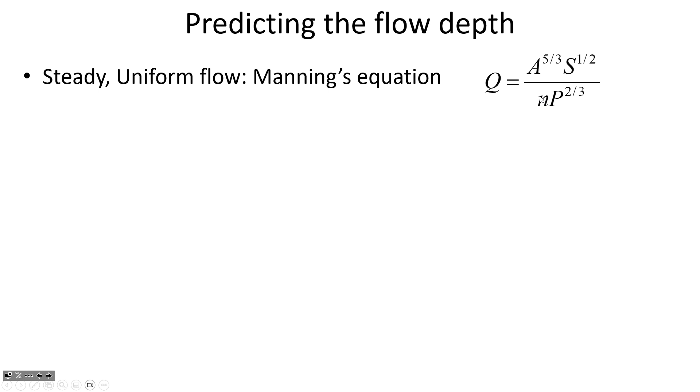So let's just review where we're at with open channel flow. When conditions are steady and uniform, like they were on the exam with that first problem, what it means is that you can calculate the normal depth according to Manning's equation. So the normal depth, just what makes it normal, that would be the flow conditions if nothing is disturbing it. If there's no changes in slope, changes in geometric characteristics of the channel, if it's just steady and uniform, then the depth is determined by Manning's equation.

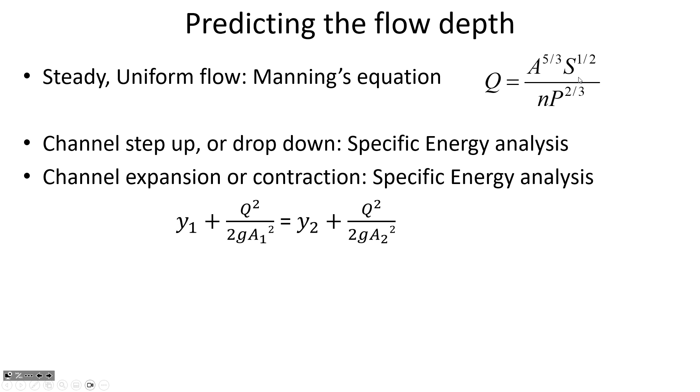If we have variations like a contraction of the channel or an expansion, if the channel bed goes up or down, then we can use specific energy analysis to find the new depth. And we can also use specific energy analysis to find out what would be the new depth after choking. If there's some obstruction that exceeds the maximum tolerable obstruction and it forces choking upstream, then you can use specific energy analysis for that as well.

Where we're moving on to now is looking at what happens when there's a transition between upstream where there was supercritical flow and then downstream where there was subcritical flow. To have the flow starting off as supercritical, here in this first section what you can see is that the slope is steeper than the critical slope. And the critical slope is defined as what is the slope that would cause critical depth. So if you had a slope steeper than that, then it's going to force supercritical flow. And that's not the only thing that will cause supercritical flow, but it's one thing that would.

So if you had a steep slope join a mild slope—one that's less than the critical slope—then that forces a hydraulic jump. And so what we need is some tools to describe what will be the new depth downstream after it goes through that transition. And the reason why we need new tools is that energy is not conserved in the same way as it is with a channel expansion or contraction.

And even when energy isn't conserved, remember the way that we handled it was by having some coefficient on the right-hand side of the equation, a C value that was similar to a local loss, and we just accounted for the energy loss as a function of the velocity head. But that won't work with a hydraulic jump. Energy isn't conserved, but momentum is conserved. And so we can use that approach to find out what's the new depth downstream.

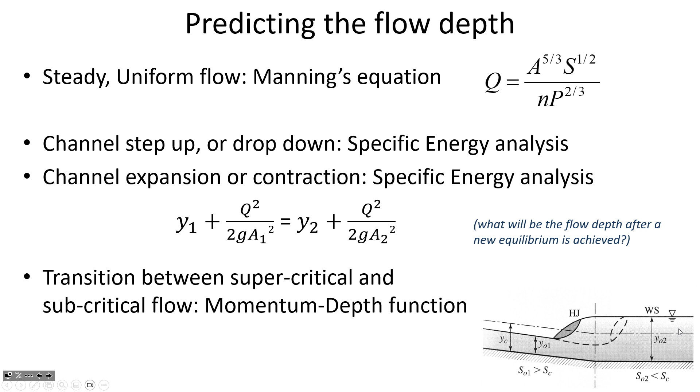By momentum, you may remember back in fluid mechanics, momentum is in a closed conduit environment looking at what forces would need to be applied to a flange in order to hold a valve steady. You know, like if we had a contracting diameter and then a jet of water coming out, you've probably felt that before with a hose. If you're spraying off a car at home and you've got a really high velocity coming out of the hose, you kind of have to push back against the natural motion of the valve to hold it steady.

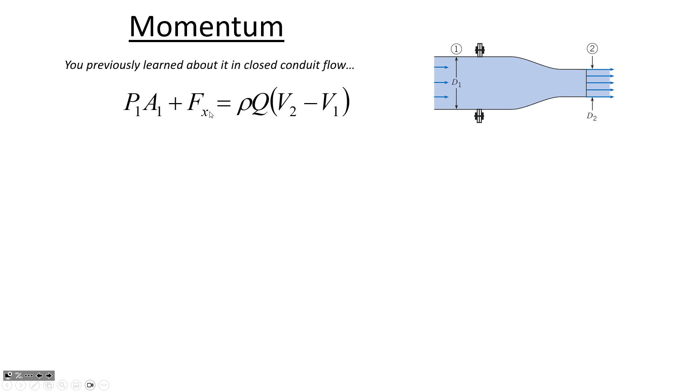The momentum equation says that there's some external force required to hold the system steady if there's a difference in velocities, so it's a change in velocities. Here we had a large diameter, meaning a slow velocity, a small diameter, meaning a fast velocity, and it was the change in velocities and also taking into account the pressure effect in this enclosed section of the pipe, that the difference between those two is why an external force has to be applied to hold the system steady.

In open channel flow, the situation's a little bit different. If we have, for example, water flowing downstream and some change in depth, then the momentum equation in a case like that has two terms. It has a hydrostatic term, which is related to the depth to the centroid. So here h bar, what I'm talking about is the depth to the centroid, from the surface downward, how deep is it to the center of area of the cross section. So this is the hydrostatic component of momentum, and this is the dynamic component of momentum.

If we have q squared divided by g a1, this is just a function of how quickly the water's moving, so both of those play a component in the total amount of momentum in the system. If we just looked at a certain location upstream and a certain location downstream, we could use this to find out how the momentum is changing from maybe predominantly dynamic in the case of a shallow depth to predominantly hydrostatic in the case of an increasing depth.

If you multiply both sides of this equation by the unit weight of water, gamma, then the units end up being units of force. If we did kind of an analysis of the units, area multiplied by depth gives you volume, multiply that by unit weight, now you've got newtons. So units of force on both sides of the equation.

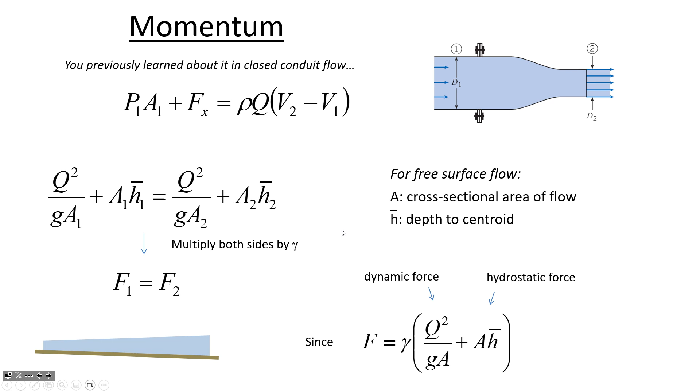This momentum analysis is useful to us in trying to determine what the new depth may be after a hydraulic jump.

Let's look at some of the things that could cause a hydraulic jump. We already saw this one: a steep slope joining a mild slope, where the steep slope was causing supercritical flow. The mild slope can't support supercritical flow, so there's no reason for the water to be flowing supercritical on a mild slope. It may temporarily, but not for long. Eventually it will have to jump up to a subcritical depth, and it will go through a transition that's the hydraulic jump. This is one kind of real world scenario that would cause a hydraulic jump, and you see this when you're river rafting sometime. If there's a steep section of rapids and then it flattens out to a more shallow part of the river, it's very often that there would be a standing wave in the river in a location like that where you've got steep slope joining mild slope.

Here's another case of some sort of a physical interference with the flow that could cause a hydraulic jump. This is a mild slope, so ordinarily we wouldn't expect to see supercritical flow on a mild slope, except that this gate is causing pooling upstream. So we put a gate down into the water, and that forced the water to rise upstream of the gate until there was enough energy to force the water under the gate at a high velocity. So this high velocity flow under the gate is supercritical, but it's supercritical on a mild slope, so it can't be sustained indefinitely. And so what it does is it'll gradually increase for a little bit, but then it goes through a hydraulic jump, which is a rapid variation in flow, and it matches the downstream depth that can be supported on a mild slope.

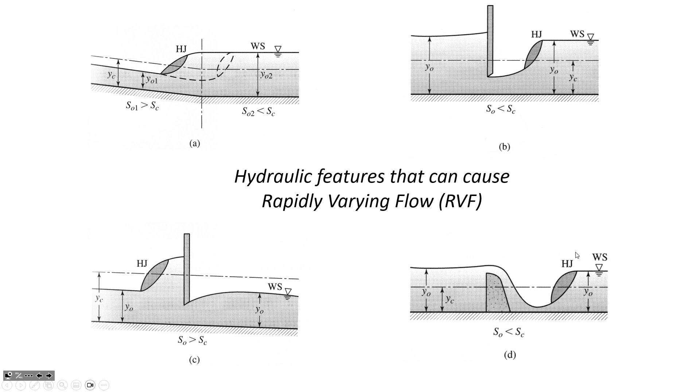There's two main ways to solve it. One is graphically with a momentum depth diagram, and we can also do it numerically with something called the Belanger momentum equation. We'll do both ways - we'll analyze hydraulic jumps with the graphical approach and the numerical approach.

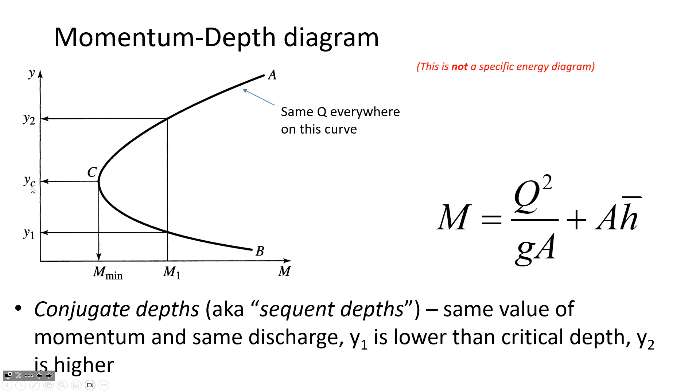So that's a common thing. When you're on the underside of the momentum depth diagram, those are all supercritical depths, and when you're on the top side, those are all subcritical depths. If this is critical depth, any depth less than critical is supercritical, and any depth greater than critical is subcritical. So there are some similarities and some differences.

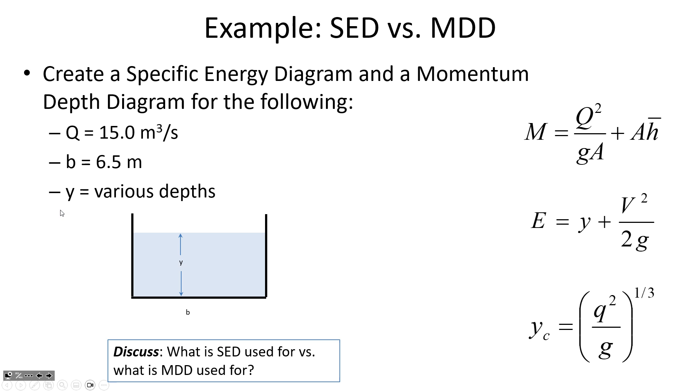We are going to use that template file I told you about on Blackboard and create both a specific energy diagram and a momentum depth diagram, so we can compare and contrast the two. This is a channel with a bottom width of 6.5 meters, and we're putting a flow of 15 cubic meters per second through it. There's a variety of different depths which correspond to different slopes we could put in the channel to cause those depths. Let's open up that template file and get started working on that together.

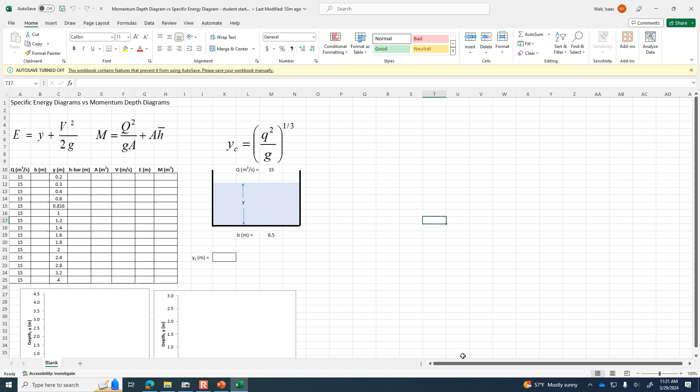Okay, so you can see our channel is 6.5 meters wide. It's rectangular, which is nice because it makes it easy to calculate the critical depth. By the way, problem 1 on the exam, that channel was not rectangular, right? So if you want to calculate the critical depth, you can't use this formula unless it's rectangular. We're going to use this one because this is a rectangular channel, but you couldn't use this equation for a triangular channel because there's no meaning to flow per unit width if the channel isn't rectangular.

So what we're going to do is look at a variety of different depths. You wouldn't necessarily know which depths to use if you were creating a momentum depth diagram from scratch—sometimes that's an iterative process where you try some depths, see how your graph looks, and adjust as needed. But just for simplicity's sake, I've already specified which depths we need to use.

So let's put in the width of the channel, which we know to be 6.5 meters, and that applies to all of the different rows. Every row is for a flow rate of 15 cubic meters per second.

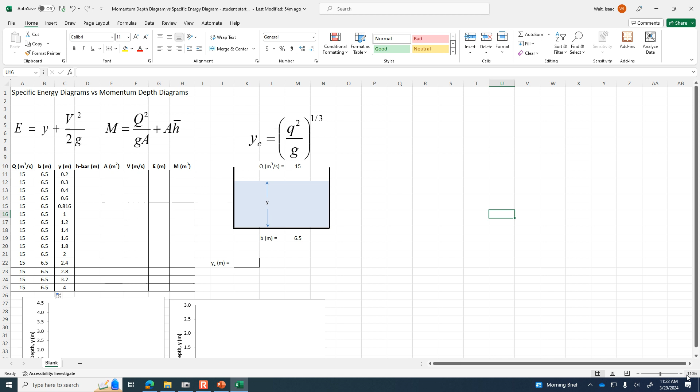Now h bar for a rectangular channel is just half the depth. It's not quite that simple if you've got a trapezoidal channel, but if this is your depth y, then h bar is just half the depth, so y divided by 2 for a rectangular channel. Let's do that: equals this divided by 2.

You're going from the top of the water to the center of area. And the center of area, like centroids you learned about back in statics, the center of area of a rectangle is halfway down from the top. Of course, if it was trapezoidal, the center of area would be closer to the top—less than halfway—because those sloped sides would bring the overall center of area average upward.

Okay, so let's apply that formula down through all of the depths, just depth divided by 2. Now the area will be the width multiplied by the depth—this B value multiplied by whatever depth we've got, to find the cross-sectional area for that depth.

Now if we know the area and we know the flow rate, then we can find V by Q divided by the area. That's the formula we'll apply for column F—the flow rate divided by the area. So we've got some really high velocities associated with the small depths, some really low velocities associated with the deep depths, and a lot of values in between.

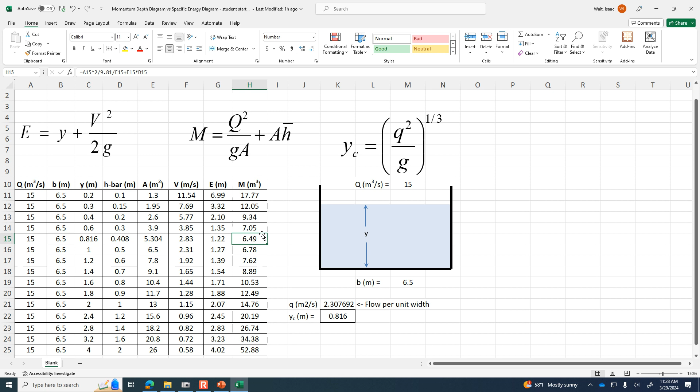And yeah, it does appear to be the minimum specific energy. And also, it's the minimum momentum function. So here's our critical depth.

Now the graph, oh, did I already have it set up to just automatically make the graph? I guess that saves you from having to format labels and so on, but is yours doing the same thing where it's already got the graph built?

Okay, so if we look at that, you see what I mean about the shape? The specific energy diagram turns into a straight line in a way that the momentum function doesn't quite match. It continues curving. But they do share similar characteristics, both pointing over at the critical depth on the vertical axis.

And there are two places where you'd cross the curve. If you go straight up from a certain amount of specific energy, those are alternate depths, used to find alternate depths for the same specific energy. Whereas here, the momentum depth diagram can be used to find sequent depths for the same M.

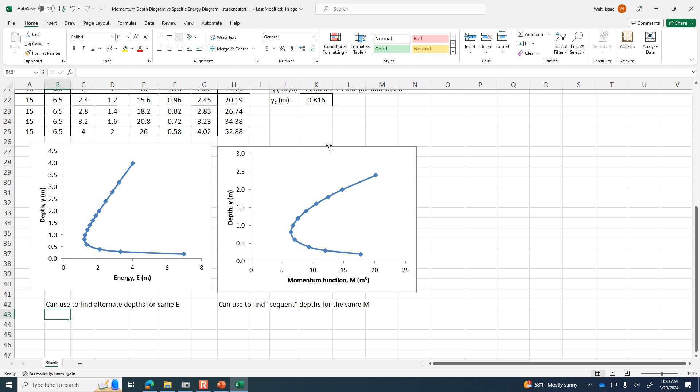So if you have a hydraulic jump, the depth before the jump and the depth after the jump would be two crossings of the curve with a vertical line.

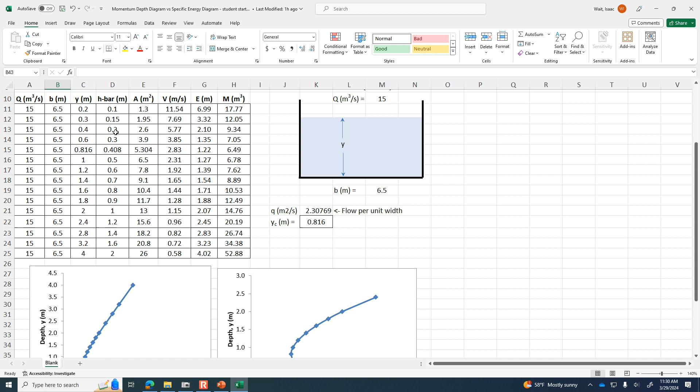So for example, if we had this channel with 15 cubic meters per second going through it, and we measured the depth before the hydraulic jump and it was 0.3 meters, we'd say, all right, we know we have 12.05 cubic meters of momentum. Where else do we have about 12 cubic meters of momentum? Well, it's between these two points.

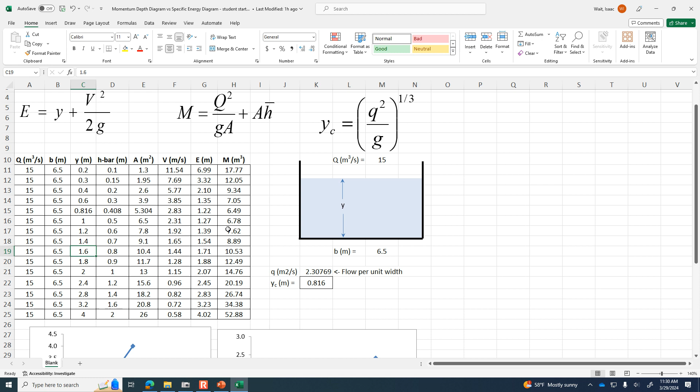So we could tell that if our upstream depth was 0.3 meters, then our downstream depth is going to be about 1.75 meters. So if our starting depth was 0.3, we'd go over, intersect, up, and then to the left again, and that's how we could graphically determine the downstream depth after the water experiences the hydraulic jump.

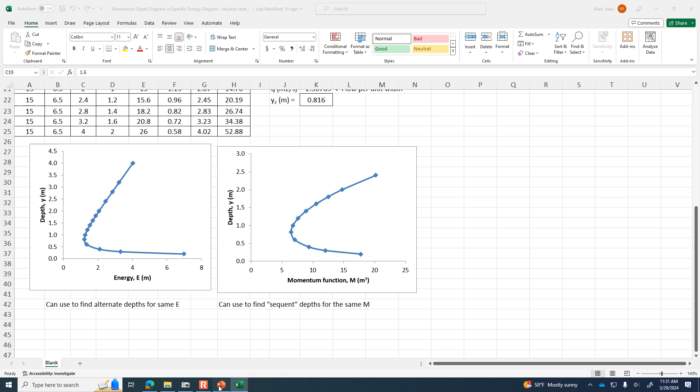So now you've drawn both a momentum depth diagram and also a specific energy diagram. Any questions before we move on from the Excel part?

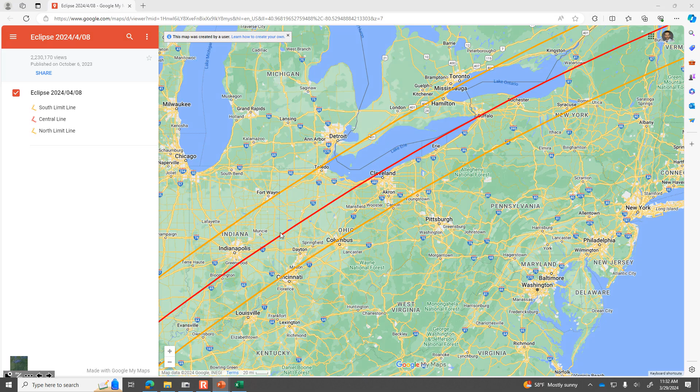So hydraulic jump is where you have supercritical flow at a location where it cannot be sustained. And why can't it be sustained? Because the slope is mild. And so if you have a mild slope but supercritical flow, it can't continue forever. It's going to go through this rapid transition to find the new subcritical depth that has the same amount of momentum. So let's watch a YouTube video that explains a little bit more about hydraulic jumps.

Pause my recorder. It's a bad thing to carry sediment downstream because it can be damaging to aquatic life. It can, over time, cause the stream to change its path. If you've got a lot of scour, it could make the banks unstable. So it's really important to dissipate that energy.

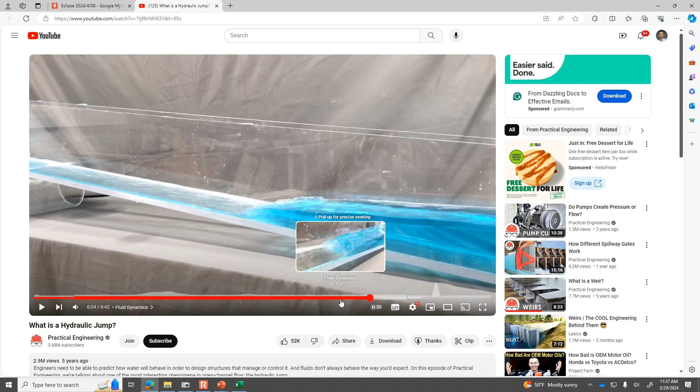This video did a good job of explaining how it's an important process to try to design a location where you force the hydraulic jump to occur, somewhere with a concrete lining at the bottom. Because if it goes through the hydraulic jump after this stilling basin, you're having quite a lot of turbulence tearing up the naturally earthlined channel, or gravel, or whatever the channel's made out of. You don't want the hydraulic jump to occur in the natural stream, but in a location with a more rugged environment that can handle all the turbulence that's occurring.

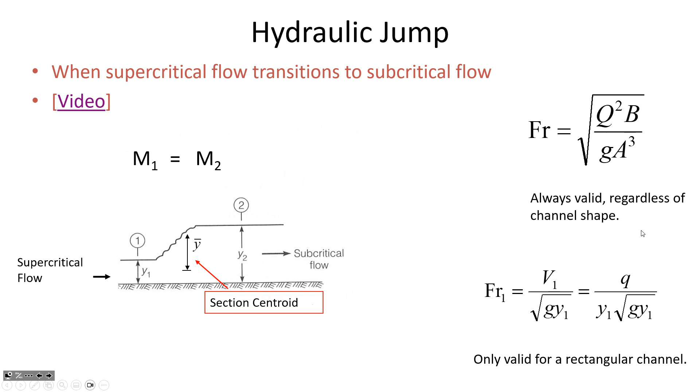So the Froude number is an important parameter that's going to go into the Belanger momentum equation. We have to calculate the Froude number when we're doing sequent depth calculations, because it's part of the equation we use to find the downstream depth. Remember that this version of the Froude number always applies regardless of the channel shape, but there are certain simplifications we can use that only apply if it's a rectangular channel.

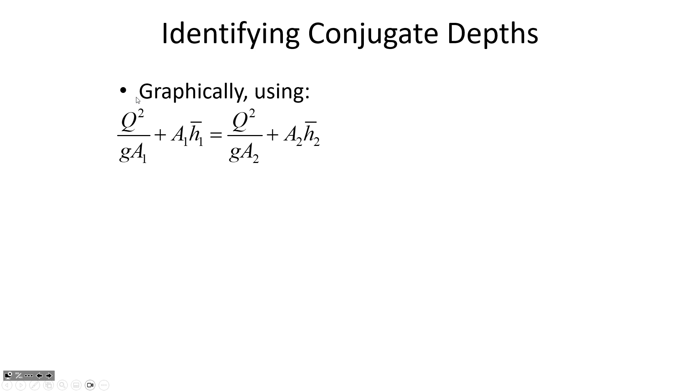So conjugate depths are the depths that have the same amount of momentum upstream and downstream of a hydraulic jump. We can go through the graphical approach like we did earlier in today's class. That process is just that you have some initial supercritical depth that's known. You'd intersect the momentum curve, find the alternate or conjugate depth, which is another crossing point with the same amount of momentum, then go back over to the vertical axis and find the new downstream depth associated with that same amount of momentum.

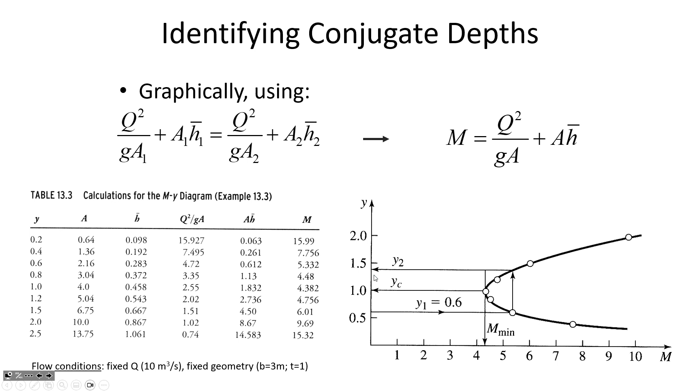That's the graphical approach. The numerical approach uses the Belanger momentum equation, and here you can see that what we're solving for is the unknown downstream depth after the hydraulic jump based on the upstream depth prior to the hydraulic jump, meaning immediately prior to it. Because as I mentioned earlier, sometimes there's a period of gradual flow that precedes the rapid variation in flow. Let me draw a sketch on the whiteboard to emphasize that point.

So here's the bottom of the channel. What if we had a gate that was partly open and it caused pooling upstream, and the pooling meant the water is moving very fast underneath because the deep water has a lot of pressure at the opening, so it's moving at a high velocity. It's going to continue to contract for a little bit, and then it may go through a gradual increase before it finally goes through a rapid increase in depth.

The Belanger momentum equation is saying Y1 would be immediately before the hydraulic jump. It's not during this section -- this is some other depth, but there's a gradual increase in depth before it finally jumps. The reason it's gradually increasing for a while is that Y2, the downstream depth, meaning after the jump, is the normal depth associated with the downstream. So it's going to go through a gradual increase until the upstream depth matches the downstream depth. It's not like the water is thinking, but the water is increasing its depth until the amount of momentum matches the downstream depth that has to be matched up against after the hydraulic jump.

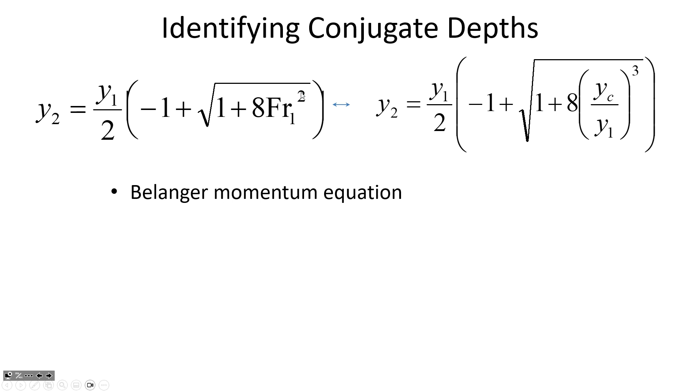So in this Belanger momentum equation, Y1 is before the jump, and Y2 is after the hydraulic jump. You can see that one way to determine the downstream depth is as a function of the Froude number upstream, so FR subscript 1 means the Froude number at location 1, before the hydraulic jump. Or the other way to do it is as a ratio of the critical depth to Y1. But notice, this is the Froude number squared, whereas this is 8 times the ratio of depths to the third power. So pay special attention to what exponent you should be using, whether you're going with the Froude number or the ratio of the depths.

Now, this equation isn't perfect. It has some assumptions that aren't true. For example, there isn't a uniform velocity distribution. This equation assumes that the velocity before the jump is the same at every depth. Well, we know that's not true, ever, because of the no-slip condition. But that's what this formula is assuming. Why? Because the math would be a lot more complicated if we didn't assume that.

So this isn't always going to be 100% accurate. If you take this formula out into the real world and do physical observations, it'll be pretty close, but not perfect in predicting what's actually happening out in the field. One of the reasons why, probably the most egregious, is it's assuming a uniform velocity distribution.

It's assuming this, where we know more realistically the velocity distribution looks like the water moving faster at the top than at the bottom. So we've got big velocities at the top, slow velocities at the bottom, and then right in contact with the channel bottom there's no velocity because of the no-slip condition.

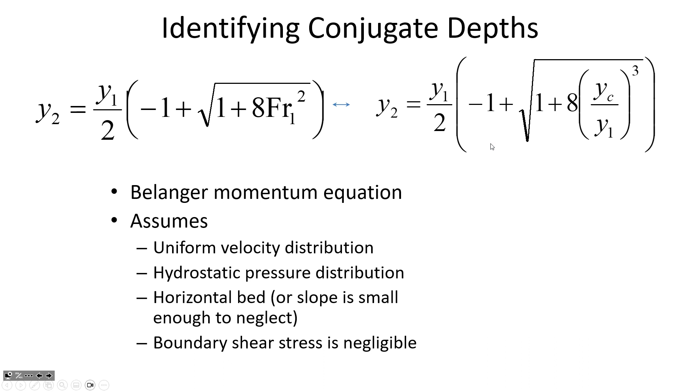So with an understanding of those limitations, and knowing that this equation's never going to be perfect at predicting reality, we can still use it and get pretty good results. But in a more sophisticated environment where precision is really important, there would be other ways of predicting the downstream depth besides just this simple Belanger momentum approach.

We'll work on an example when we get together next week on Monday. We'll try out the Belanger momentum equation, run some calculations, and also calculate delta E just to see how much of the initial energy in the flow is dissipated through a hydraulic jump. It depends on how intense the hydraulic jump is and the ratio of the depths.